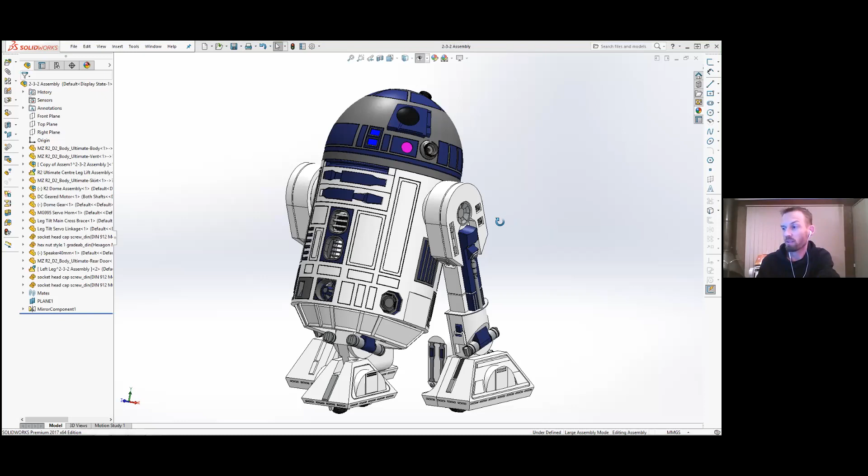Yeah, all right. So I'll bring up the model that I've got currently. See how this all works and see if it's all good. You should be able to see that now. So this looks like a standard R2. So thank you to you, Michael, for sharing your files, because that's sort of the basis for the body and the dome. I think the legs I pretty much had to remodel entirely, and the center leg, just for different features that I needed on it.

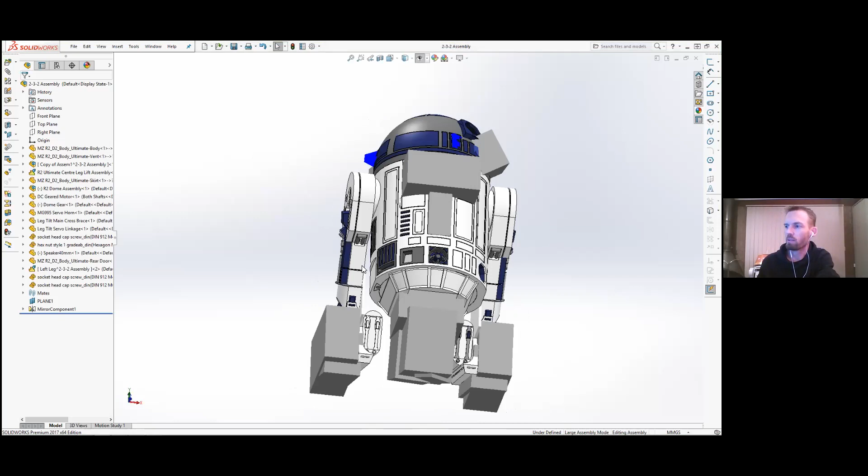So I guess I learned a bit from the version 1, where this is broken into many pieces. And then adding the mechanisms within the legs, which we can sort of go into. But the dome's pretty much independent. I can hide that at this point because we don't really have to look at that yet. I'm still working on the mini dome with a periscope.

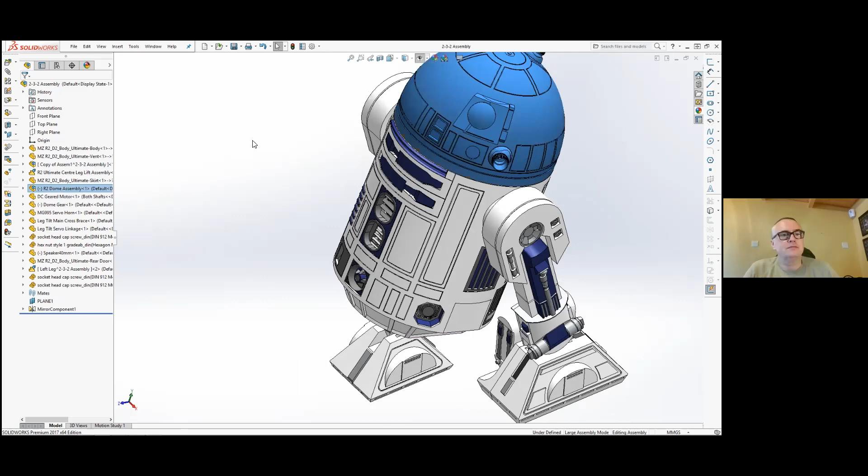So it's working. And then working with, like I said, the other builder, Gary, he's been working on verifying code for me, which has been good. Just having a second person to bounce it off is always a good thing. He can sort of test it before the whole gaggle of people get it.

So the main operating linkages that are within it, there's a slider crank mechanism in the front for the center leg, and then just a levered crank in the back, which connects across the back here to connect both legs together. And then for R2 to stand up when he goes into 2-leg mode, there's a tie rod that runs from the top of the leg here fixed to the body and runs all the way down, but we can sort of explode that in one of the other views.

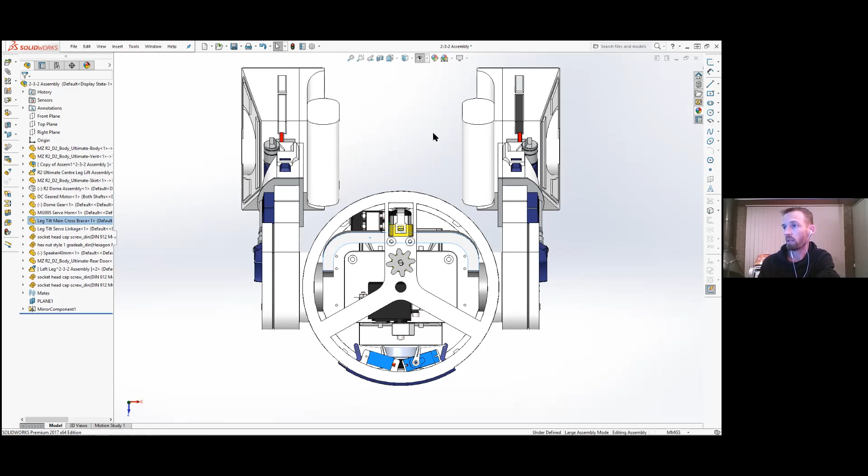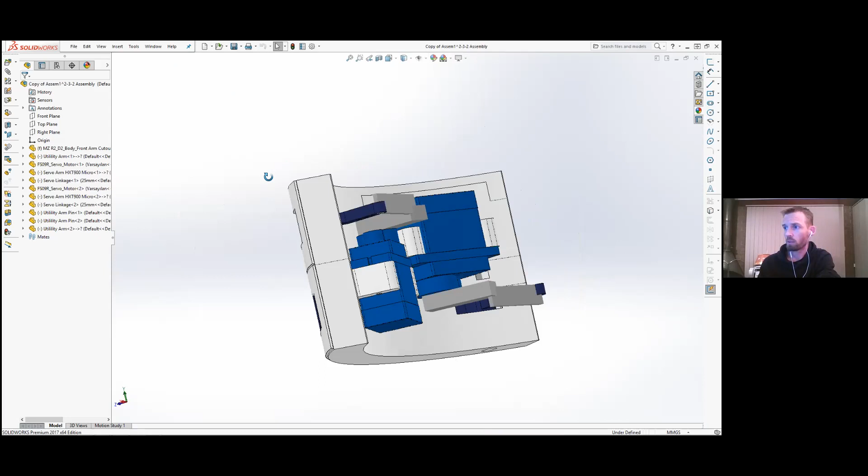So I think probably the easiest way, I won't probably go into the front arm too much. I'll open that a little bit. So this has already been released anyway. So some of these are the same setups that's already existing that people have access to. So the front arm mechanism is two SG90 servos. So people can go ahead and print that, can they? Yeah, so this is the same as what I did for the version 1. And then the principle of that is it's just an inverted sort of mechanism, similar to what you've done on the larger full scale.

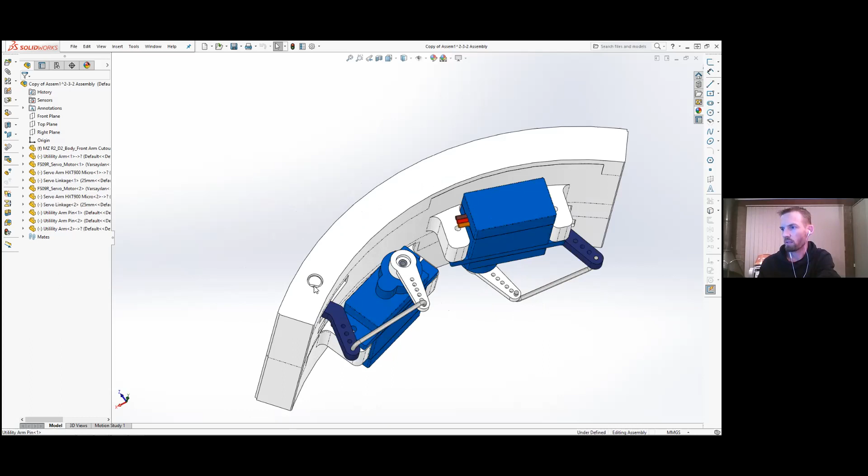So the only part needed is a bit of steel wire or a paper clip or something like that. And the rest of it's printed. The pins are all printed. So these have got a small flat on the bottom that you print it sitting flat on, but it should all come in fine on the print bed. And then it's just checking, because these are getting quite small, one of the limitations is how fine can a FDM printer print it.

So I've had to make a few sacrifices here and there, so it's all solid within there. But that was trial and error, just getting some of that to work. And these will pivot in and out. But so long as you print it, check it's all loose before you put it all together, and that the mechanisms easily work, then it shouldn't be a problem at all.

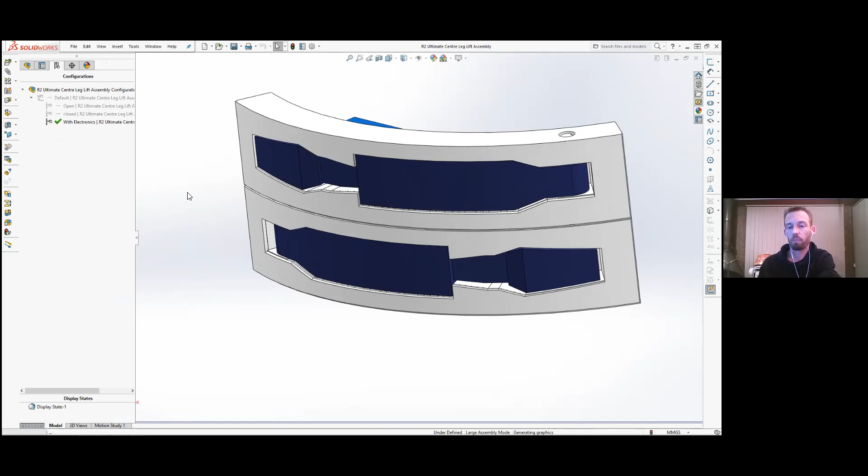So if we go back to the main center lift, the body itself is pretty much a hollow tube now to fit all this in. That was a bit of feedback, but also me printing one of them and not fitting my hand in the body. There's too much stuff in there. So I couldn't physically get my big mitt in there.

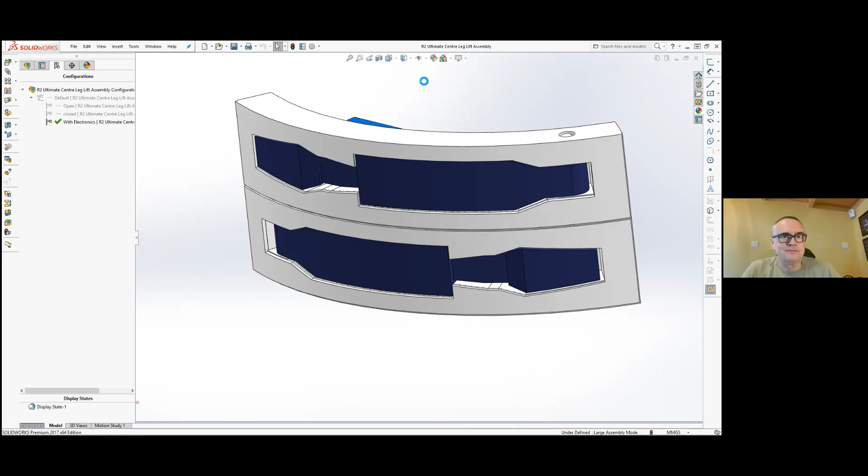You'd have to use small children to assemble it then, do you? I'm waiting for my computer to catch up.

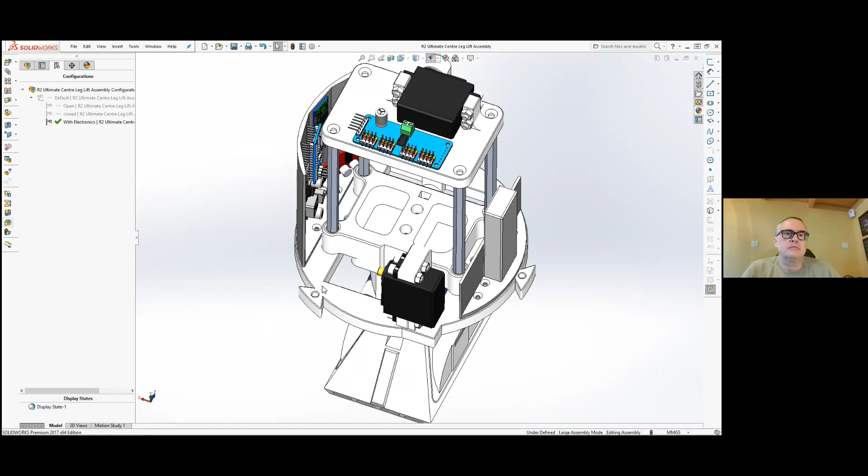I'll jump on this other drawing that we've got here. Oh, here's the center mechanism. So that's the center mechanism. So you pretty much assemble this whole unit outside of the body. There's 3 dovetail locations that locate into the body at the bottom. And this is the rear linkage that drives the leg main tilt mechanism that'll drive a servo arm up and down here.

And then the front linkage is your bell crank, 4 rails. Learning from the periscope mechanism, I had dowels on that. And then I thought, hang on, I can just print hexes. I can lay them flat on the bed, print, and then there's a perfect size, and everybody can repeat the process without buying dowels and acrylic rods and all those kind of things. So we learn as we do this and get better.

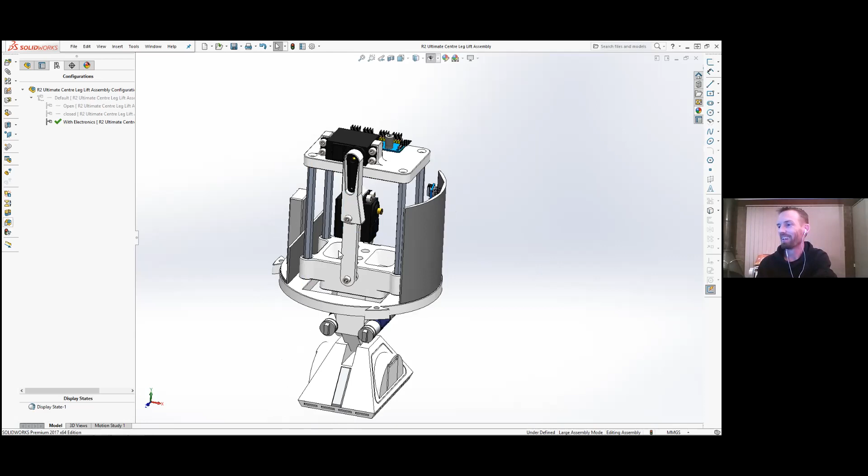So there's small things like inserted nuts, M4 nuts that go into here, captive nuts. I guess you could put a nylock in there and just lightly do that up. I haven't added bearings. I've just tried to keep it really simple. And the other thing I'm trying to do is, it's weighing about 2.5 kilos now. So the weight's actually added up quite a bit. So I'm trying to reduce the weight because it's quite chunky now.

How did the hexes slide? How would you find the hexes slide on plastic? Are they fairly smooth? Oh, perfect. You saw it working just before. It works really well. It was a bit of trial and error, but it's worked pretty well.

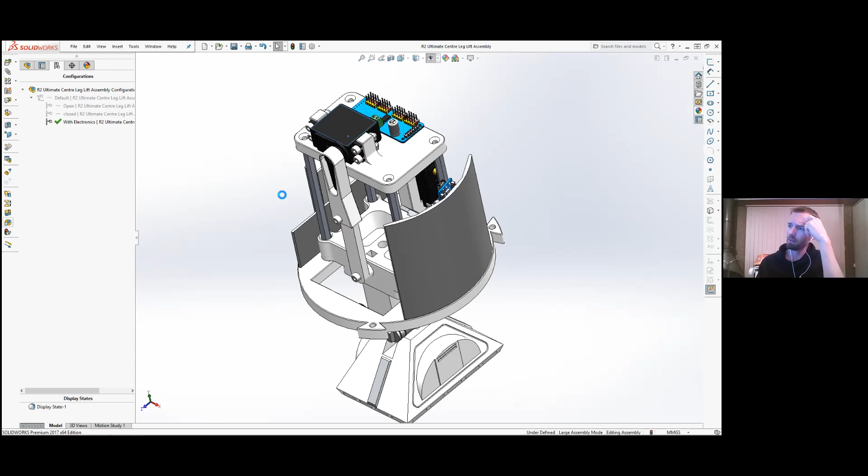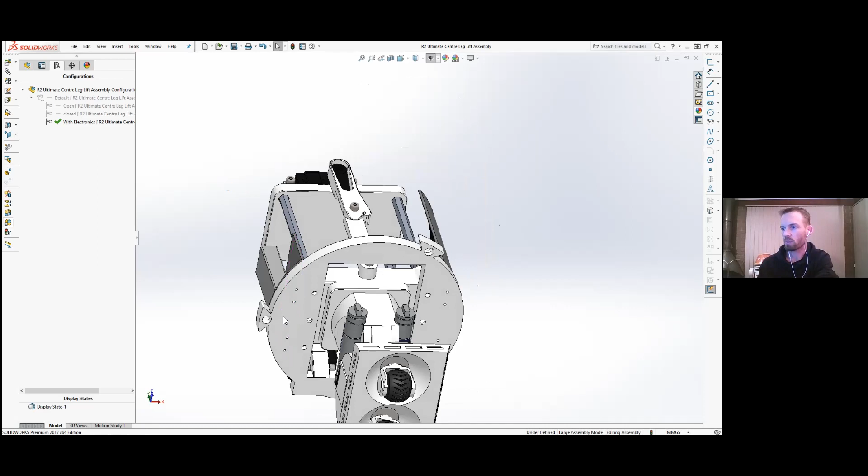And it just gave an option where you can either screw them in with a couple of wood screws or a few other options like that. But like I said, just trying to keep it simple, and then it's accessible for everybody to get all the components or print them without having too many supplier issues worldwide, sort of thing. So this has got 3 socket head cap screws or M4 bolts, whatever the case, to put it in.

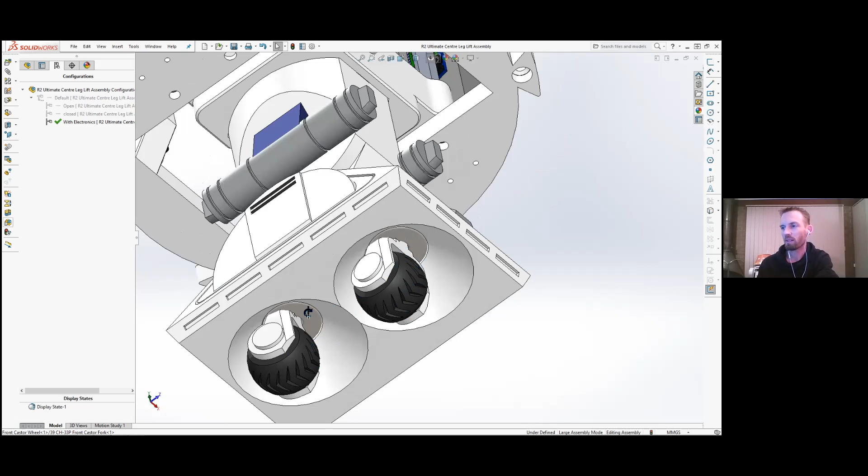Little things like the original caster wheels I did, it was sort of based on your design for Tito, I think it was. Tito, yeah. But then what I did was I realized that having the bearings in the wheel either side, which I originally did for Chopper and mini Chopper, it added too much weight because now I've got 2 idler wheels instead of 1 in the 3-leg mode. So I removed the bearings and just made this little plastic, just PLA printed 2 bearings in here, and then it works fine.

There's another bolt that just goes in here to hold the leg on. Again, just make sure it's loose when you do it up so it can pivot easily. Little things where this is the front of the droid, and I realized when I drove it, if I went in reverse, the front foot wanted to kick up in 3-leg mode. So I don't know how they do it on the big droids. I haven't made a full 2-3-2 on a large droid before.

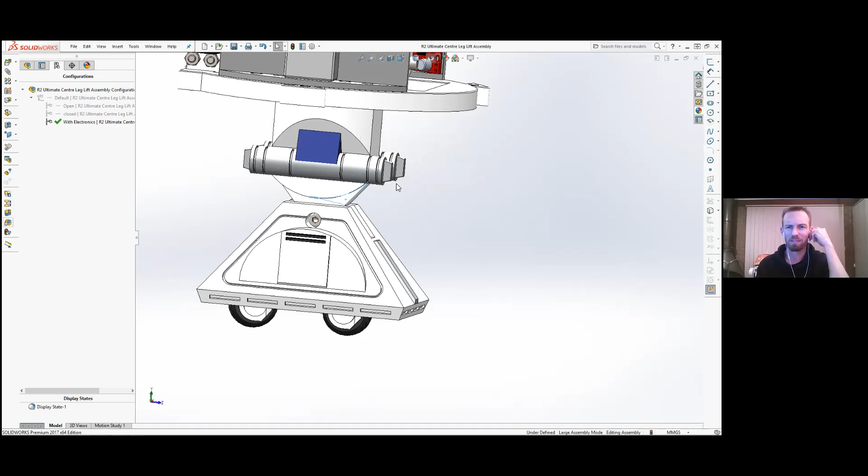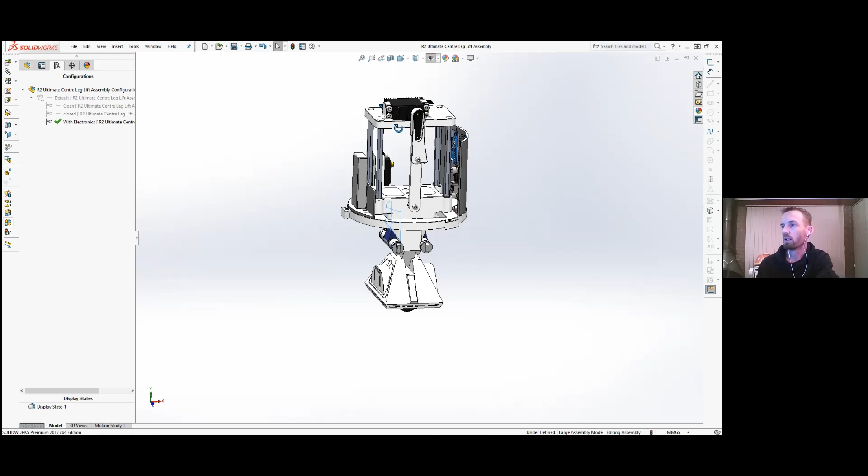So these things, the cylinders, ankle cylinders, are just printed separately, and then just a couple of dowel locations with PLA. And then this is an ankle. This is a separate piece that just inserts into this lift mechanism part. So you can pretty much assemble the lift without the foot in it, get it all working, see how the mechanism works, and then it's pretty tight in the body because that's all got to squeeze in there.

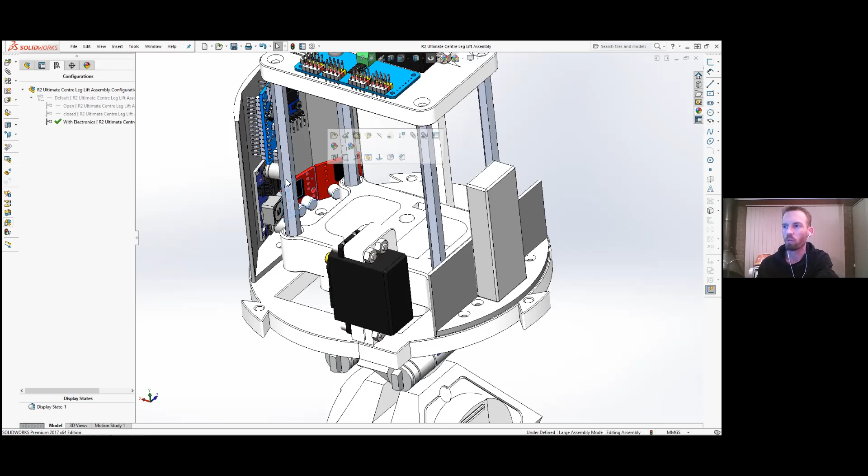At the moment, I'm using just the MX1508 motor drivers. You can replace these with whatever you want. It's really cheap. Being in Australia, sometimes it's hard for us to get stuff. We don't have the local supplies that you'd have probably in Europe or the US. I've just got a little DC-DC voltage converter, Arduino Nano, and an HC-05 Bluetooth module.

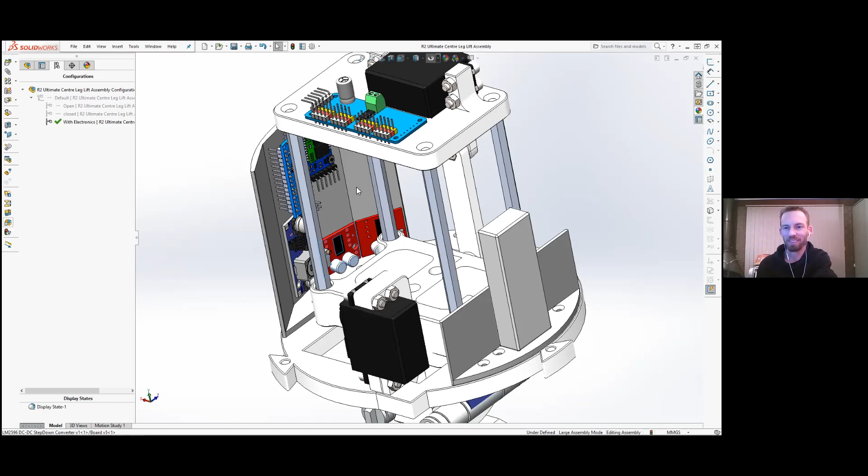That's one of the problems with the full-size one, just fitting the electronics and batteries in, and it's probably even worse on something this size. Unless it's Chopper, where it's just got this massive cavity. Yeah, exactly. All droids should be short, fat, and big. We'll just design another one that's short and fat and big. Exactly, just another totally different one. That's the great thing. You design your own. You can build it around the electronics and components, so it's easy to assemble.

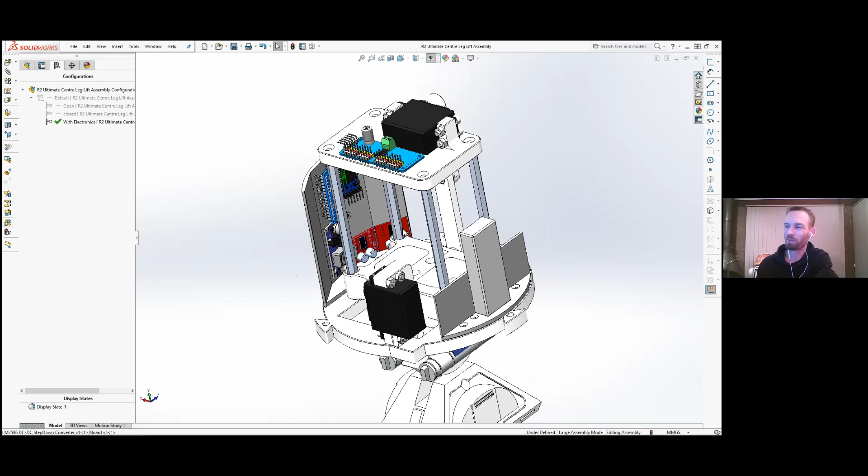That's it. Once I started, I had things driving off of the Arduino itself, and it started to get more and more complicated, and there were too many wire connections. So then I introduced the PCA9685 servo motor driver board. So this board here controls the 2 lift mechanism servos, the large ones. It controls the 2 front arms.

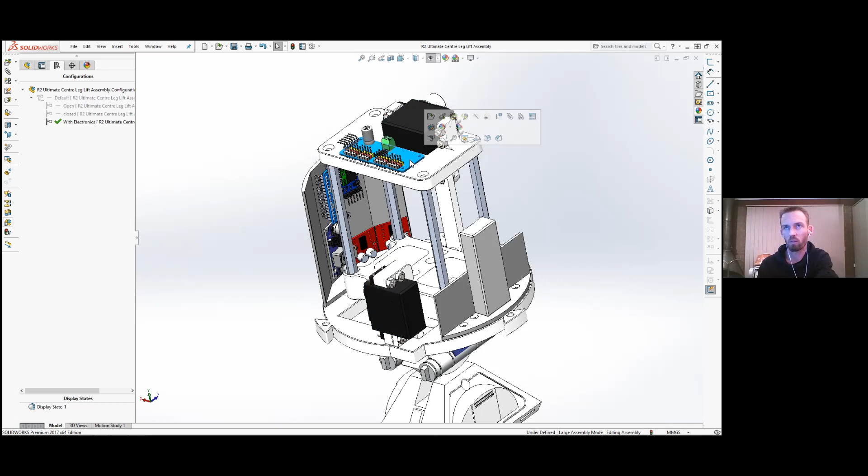And then from that, you piggyback off of this into the slip ring, which goes into the dome. And then in the dome, you have another one of these, and that's it. All the power supply, all the communication comes straight through with the 6-wire or 8-wire slip ring. There's some 6mm ones that, again, just working with Gary, we're trying to find a good source for at the moment.

You can run a separate Arduino, a PCA9685, and just a 5-volt battery supply. You can use, what are they? The little power banks that you get. I've got one somewhere else. Just these little USB power banks you can buy from Officeworks, or just use those. So this is like a 2200 milliamp hour one. I had another small one somewhere, disappeared.

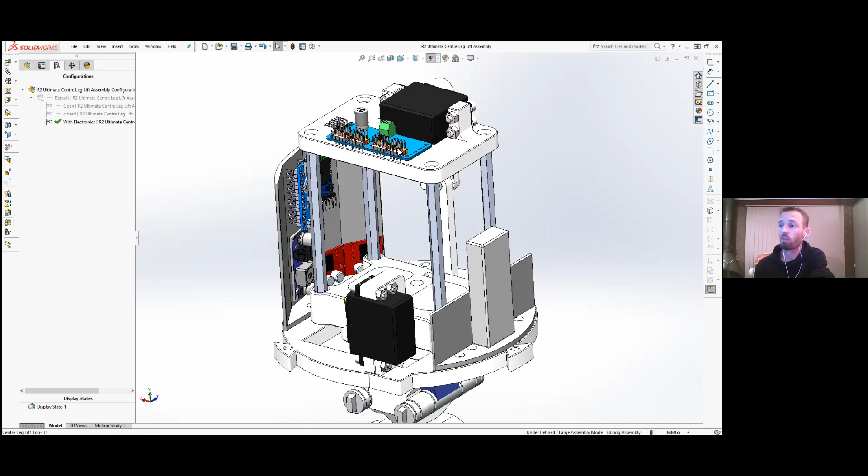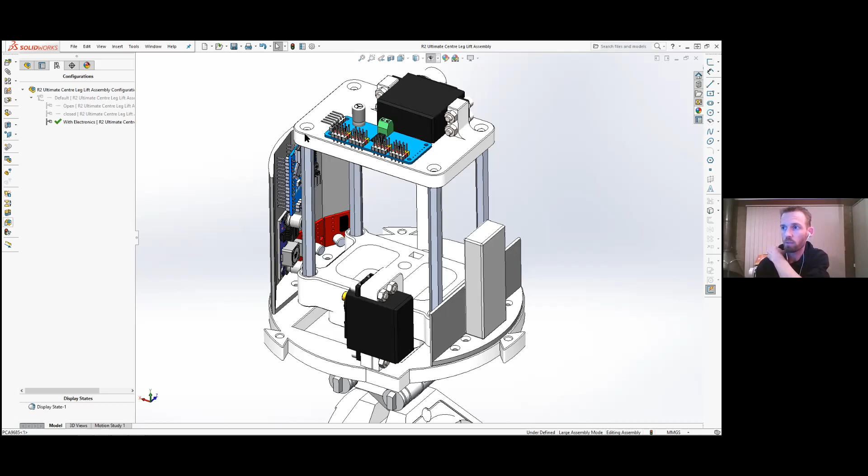So you can just run that in the dome, and on the PCA9685s, you have this one as the standard one, and then you just have to give a signal A0. You just solder the pad to give it as the second location. I've got that in the instructions as well. And then you daisy chain, but you need to send up the power through that as well. So this receives 4 lines from the Arduino, and all I did was at the top of this just put a connection and 2 JST connectors or something, so that you can slide this in.

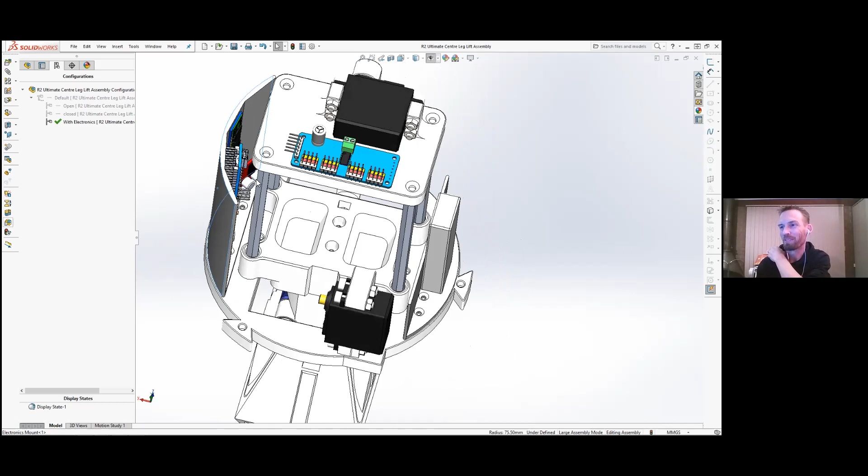These are printed mounts just to fit all the electronics on. You literally can't have anything come out the back of this, otherwise it won't fit. That's how tight it is. And then where the mechanism slides, about 2.5 mil, I think. Just enough to hot glue everything on there. So it's not too messy. And it's just a matter of cable management.

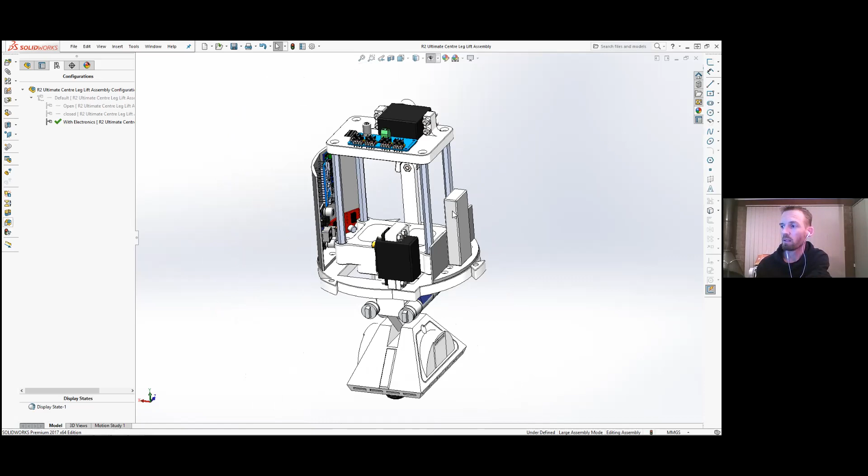This is an 850 milliamp hour battery. I guess you could piggyback a couple, but people could come up with maybe clever solutions for where to put it. You could sit it on top of the servo if you wanted to put a bigger battery in, possibly. But that's the main mechanism for the internal. That's the tricky bit for the inside, just trying to squeeze all the electronics in there. And where does the dome level come with the top of that servo? Is there much clearance?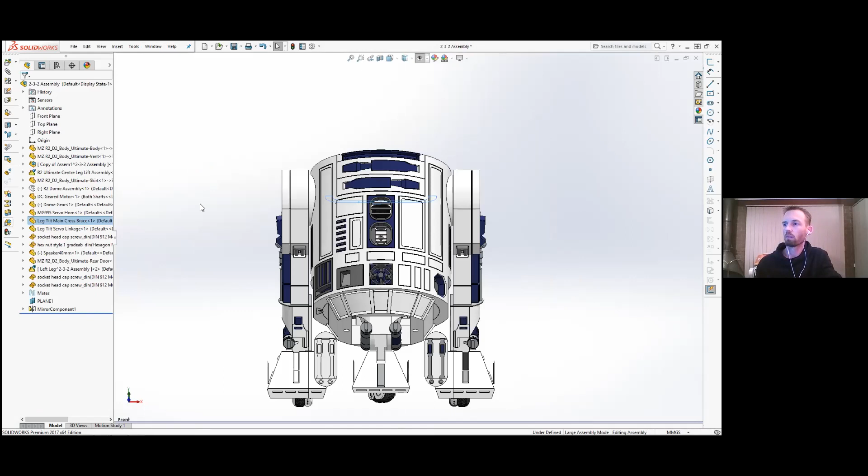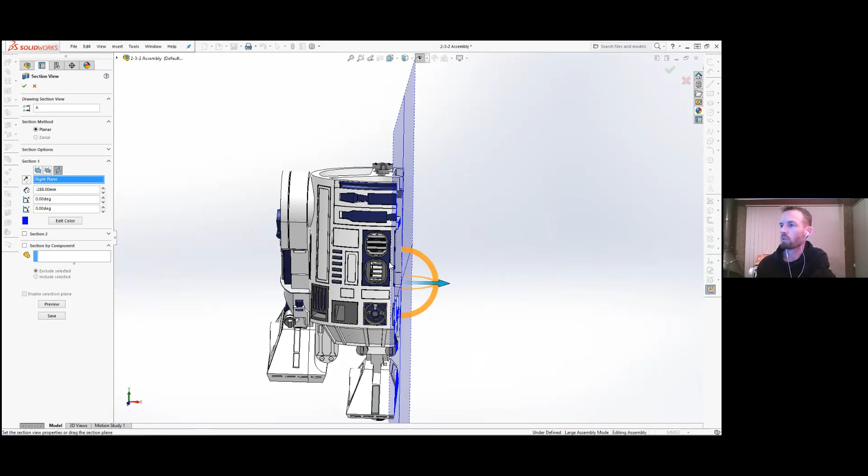Not really. I'll just do a section view in here. Let's see if we can get that, if my computer can cope. It's not too bad, but it's not great either. But as you can imagine, it's getting pretty squishy in there. Just section it there. There's not a lot of room, but then you've got the lift, the other mechanism on top of that as well. So that's where you've got the crank in the back as well.

So once you slide this into the body, and it was little things like that. Originally on version 1, the skirt is a separate print as well. Now it's got 2 socket cap screws that retain in the bottom of the base plate here at the body. I originally had it screwed in from the inside down. I couldn't fit my big hands in there, so redesign. Just a little bit more plastic. That green arm is the main linkage pivot for the leg mechanism. I'll bring that up in another image as well.

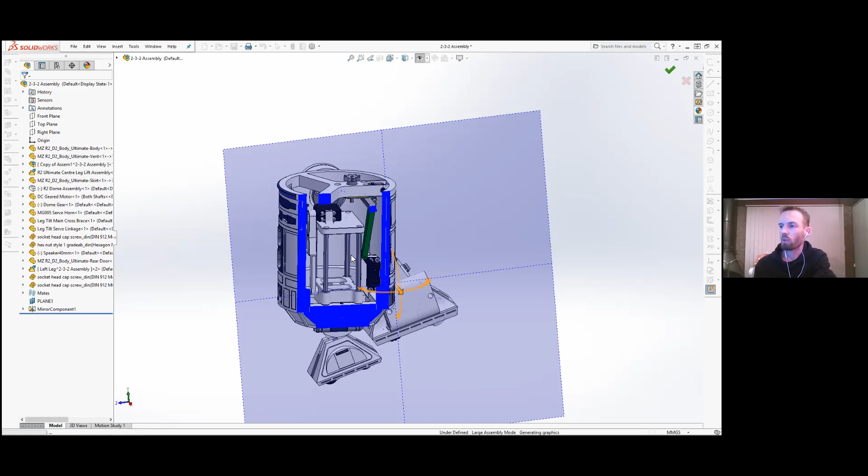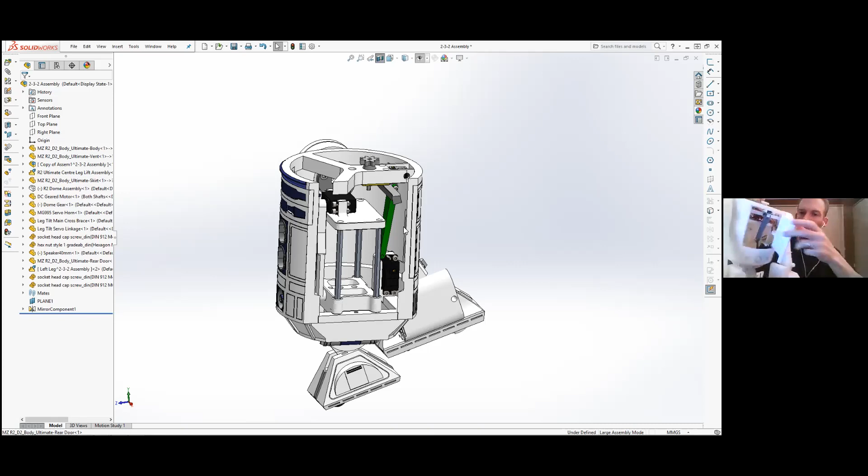Once that's all installed, the back door is separate as well. That just pops off. People can either hot glue it, or I've got a couple of small 5mm diameter magnets if they want. I've designed a little hinge in mine with a 6-bar linkage, I think. I don't know if you can see that on the screen here. It works, but it's not great, and it's just really fiddly. It's just a little hinge in there. If people want, I can put it up. Again, I probably need to get a resin printer. I'm getting too far on the limits of FDM printing.

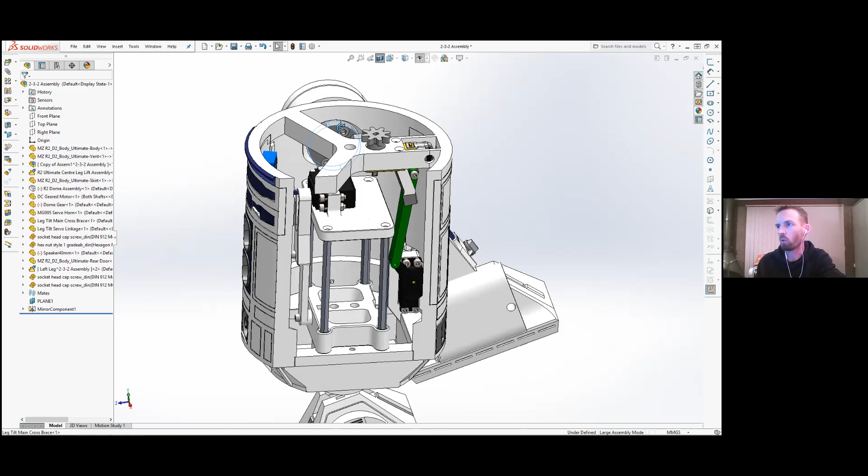So that's the summary of how that works. You put it all in with the back door off. You can get your fingers or hands in there. You can attach the little M3 bolt in here to capture this, the M4 bolt in here. But you'd assemble all this crossbar linkage internally with the legs before you put the lift mechanism in. Right, so you can have it upside down and get your hand in from the bottom. So effectively it's a 2-part build, and you can separate it fairly easily once you've assembled it. Yeah, exactly. That's where the dovetail is located in the bottom of the main body.

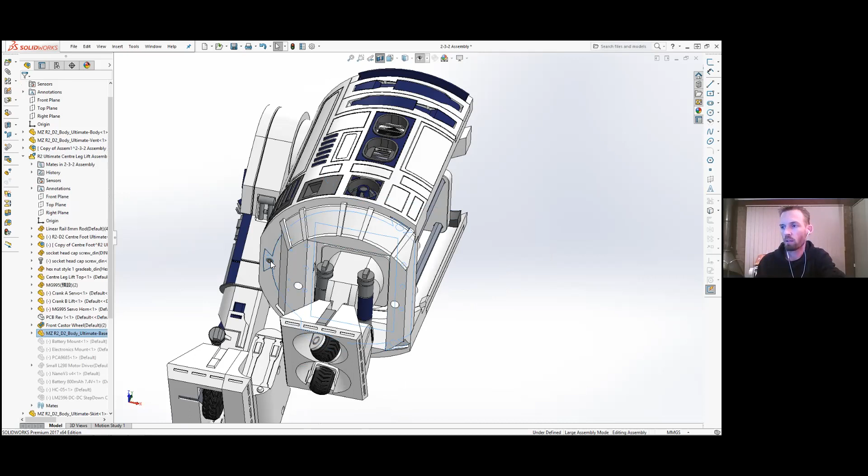Prints upside down with no supports. And then you just push in the base or that center assembly. That all just shoves in there. Three screws, and then two screws in here for the skirt to retain it in. And you can't actually see too much in there anyway, but I've got to compromise and sort of remind myself, well, this is pretty much a toy size. So when you look at a toy, there's screws sticking out everywhere. Exactly. So that's sort of the main internals.

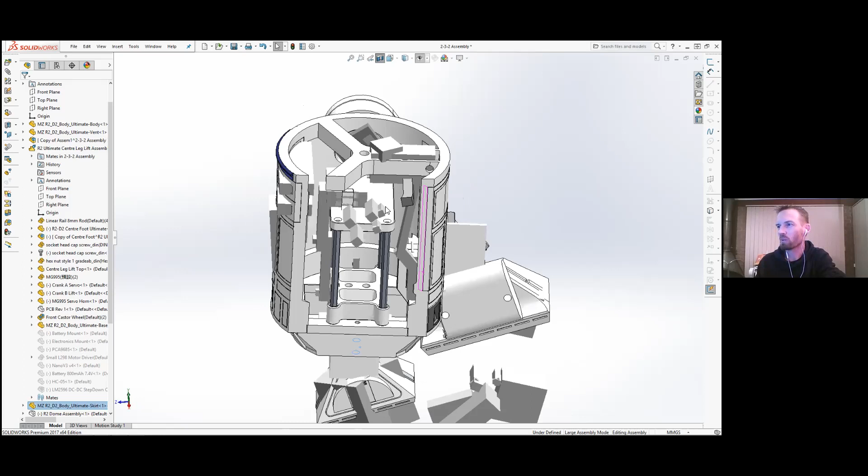And then, like I said, in hindsight, I would have made this hole on the original designs for the version 1s of these a little bit bigger, that suited sort of a 20mm slip ring or something like that. At the moment, I've got a 6mm hole that I can fit through. This is a 10mm diameter hole that is where the pivot is on the gear.

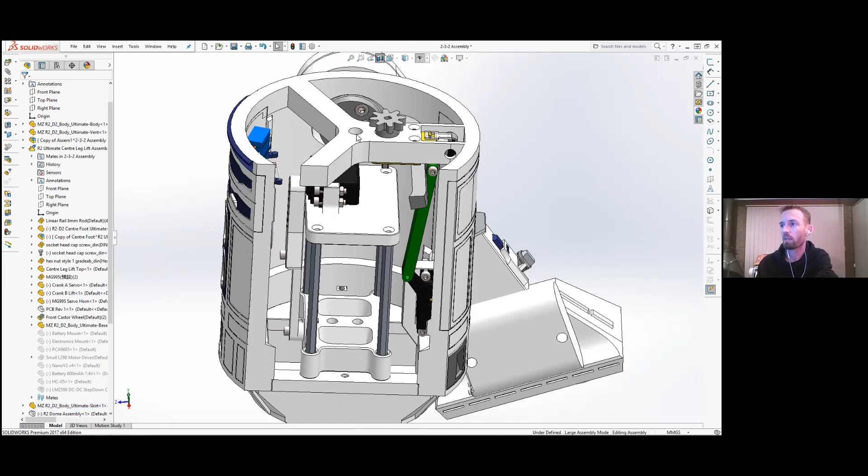Just one note, there are different geared motors of these yellow motors. There's a 1:120 ratio and a 1:48 ratio. Okay, I didn't realize that. I think Gary again pointed that out to me. So maybe just check. I had the 1:48, so I'd probably recommend those. You could have them all the same, it doesn't matter. But if it seems a bit sluggish, maybe you've got the 1:120 ratio. Did you get torque issues on the faster ones, or is it okay?

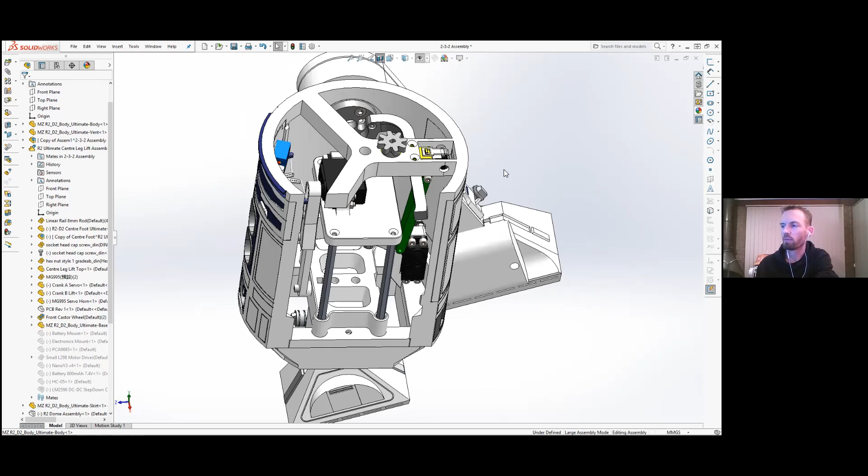No, it's all fine. But again, those motor drivers... my background's mechanical engineering and fitter and turner, so I'm not an electronics guru. I'm all self-taught. Other guys in the group, I think Ben, how do you pronounce his last name? Rees? Ben Reed, yeah. Right. And Trevor, there's a few guys in the group that are fantastic at electronics. They offer little kits, so you can get in touch with them and purchase kits from them, which is great. You've got your stuff on your website as well, little BLE boards. So there's options there that you can make this work whatever way you want.

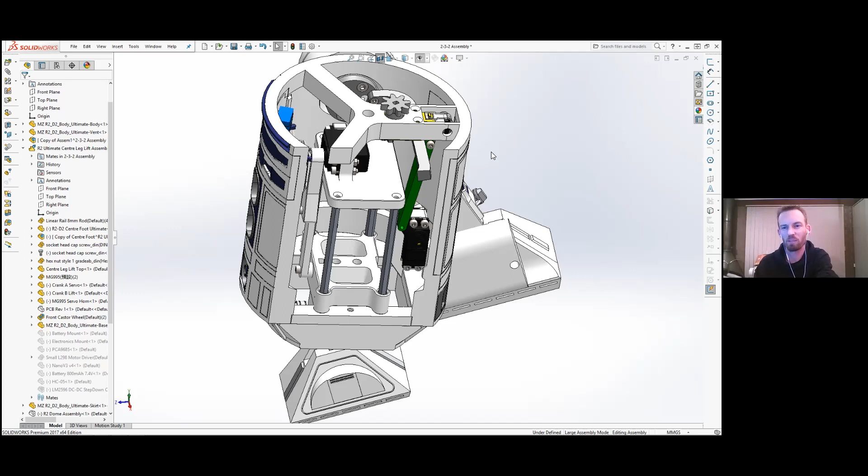Me going down the path of a Bluetooth app, that was probably to allow people to do this without purchasing RC transmitters. Yeah, absolutely. And also for gifts, if you want to make it for people as a gift, then they're not going to buy the RC. Yeah, just anybody, exactly. Then they can download the app, choose the droid they want, and off they go.

Is that on iOS? You got iOS and Android, or just Android? So it's Android at the moment. I wrote the app on MIT App Inventor, which is free software, and this works great on Android. They've released an iOS version. I tried it; it didn't work yet. Okay, so there's hope. I don't want to have to redo all the code. It's quite a bit of code, but even that, it was me learning how to do code debugging on phone apps, and why is this Bluetooth not connecting? And then my phone was hung up because when the Bluetooth doesn't connect or disconnects, what do I do? The phone didn't know what to do with itself. So just little things like that.

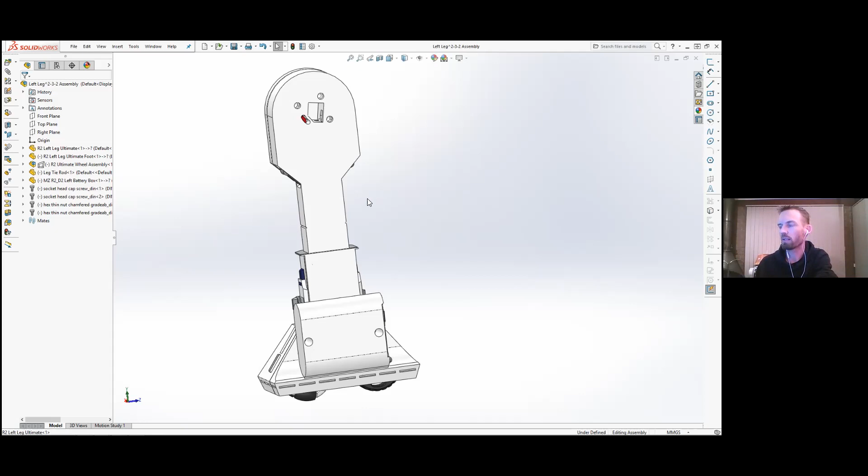But so this one here's the leg. The leg's printed flat on the bed. You can't print the leg with supports. Why? Because there's an internal cavity which allows you to run a little rod in there, which is when our R2 stands up in two-leg mode, he won't face plant. Yeah. That's the secret of the 2-3-2 bridge, which I know you worked on a bit yourself.

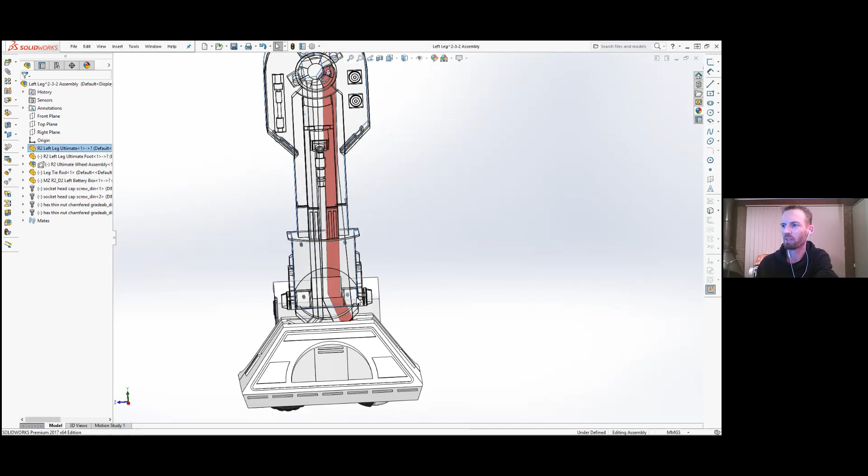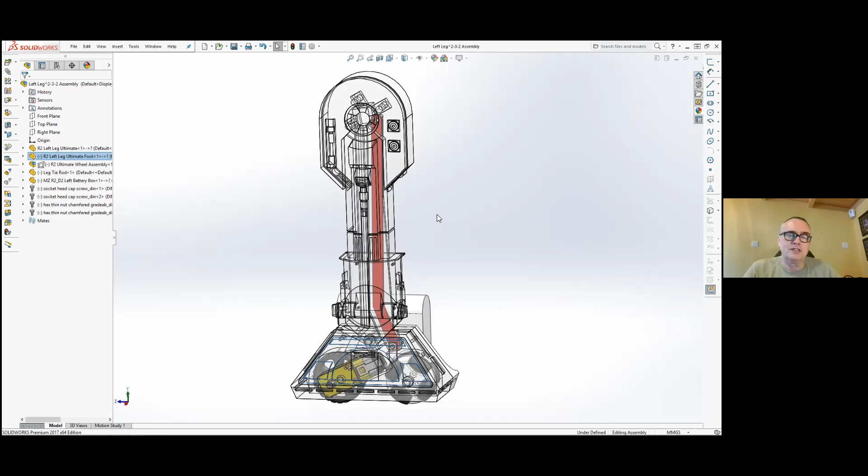I did. The physics on the full size one, that bar takes a ridiculous amount of strain. And I tried printed ones, and I tried all sorts of different ways of getting it to be strong enough in a printed mode, and I just couldn't get it. Potentially a metal one might work, but it's the advantage of smaller ones. You've not quite got as much stress on the physics side of things. Yeah, this was a bit of, I guess, trial and error.

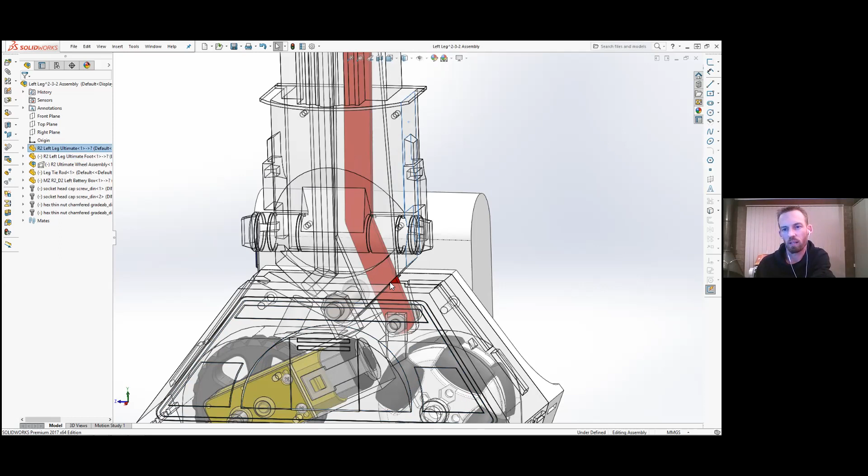Got it on the first try, which is great. It stood up and it didn't face plant. So the only thing with this is there's a retaining bolt down the bottom, which is just an M4, again, a socketed cap screw, an M6 bolt, which is the main leg pivot. So there's the leg sort of here. It's the bottom of the leg that inserts. And then I've got these wedge-shaped pieces where it's got a mechanical physical stop as well. So that takes a bit of the stress out of that as well, where it presses against the leg.

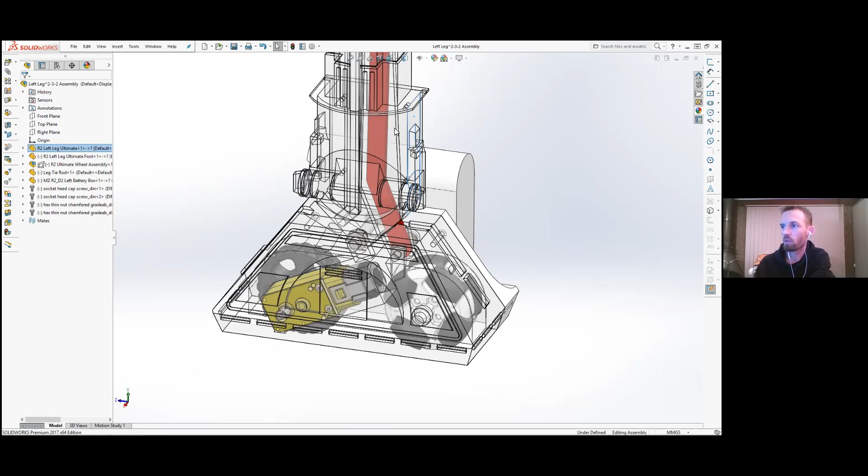Again, just the DC motor, just a 3D printed Omni wheel. People can buy them if they want to, but I just 3D print it to make it easier. And then the battery box, again, it's just a cavity filler really for this aspect. Everything sort of sticks in the foot. Bolt down the bottom. Don't print the leg with supports because it'll print flat, and then that cavity will get filled in and it won't fit in there. The bar goes up through it.

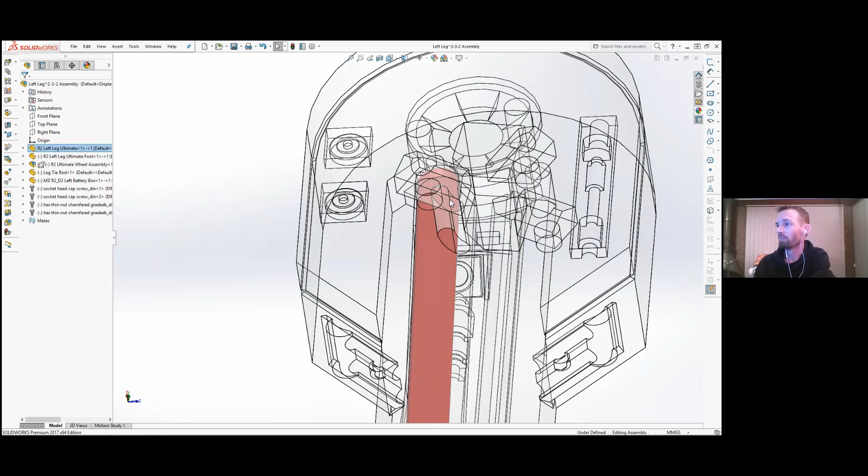It's not there, is it? It's impossible. Is it standard Omni wheel size? Yeah, 50 mil. Yeah, I went with the standard size, so if people do want to buy one, they can. I think I just downloaded an image somewhere that someone had dimensions on their page and reverse engineered it. You can buy one though, that's fine. Support the business. There's just some M3 retained nuts in here.

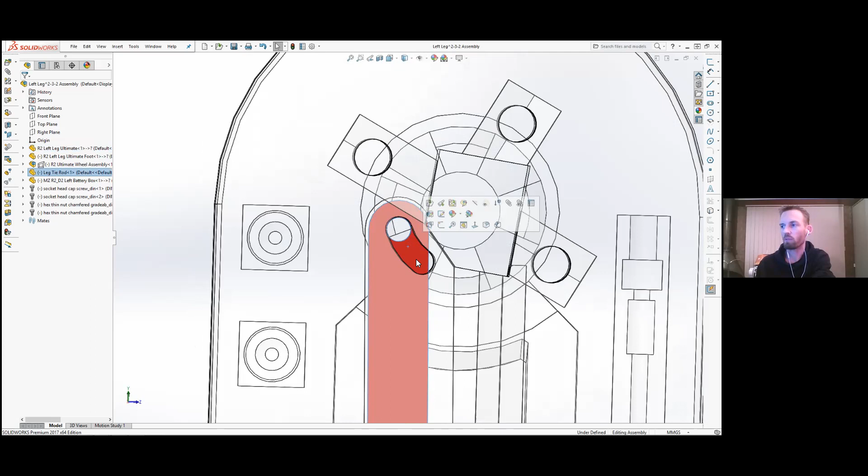And the only thing that's sort of tricky, this tie rod is the bit that actually, there's an M4 by 35 millimeter screw that goes from the body through the leg cat, through this hinge point here, because the top of this tie rod is fixed to the body. So it knows when it pivots that I want the ankle to be at 18 degrees or 0 degrees. So that's what it's controlling. So that's that secret bit of how does a 2-3-2 work? That's the linkage bit. But like you said, on a full size, it's incredible force in that, and it's got to be solid aluminium or steel.

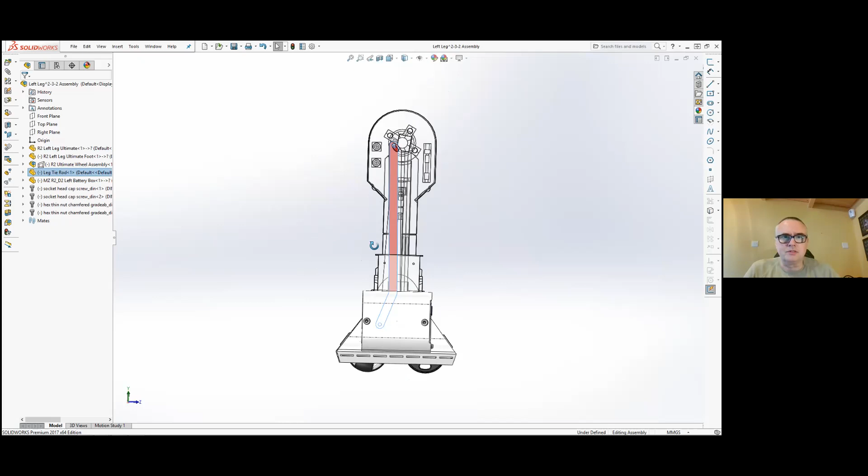I've seen some very clever gear mechanisms in the leg itself that actually give it more strength, but I've never kind of got around to having a proper look. Yeah, some guys, they'll have the gear mechanism at the top, and then they'll actually have a separate motor down here as well. But going this size, that's all I could really get away with. But I'm pretty happy it works. It has a little bit of a lean to the body slightly, just from, I guess, clearances on nuts and bolts and things when it stands up in 2-leg mode. But other than that, it's worked pretty well.

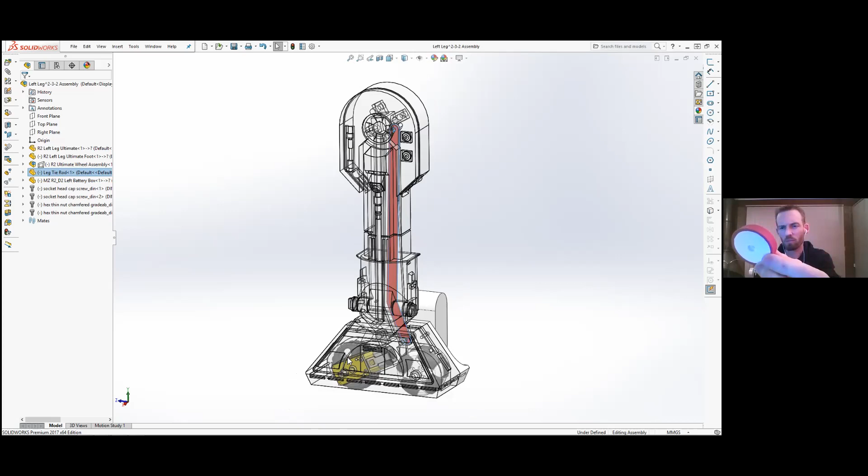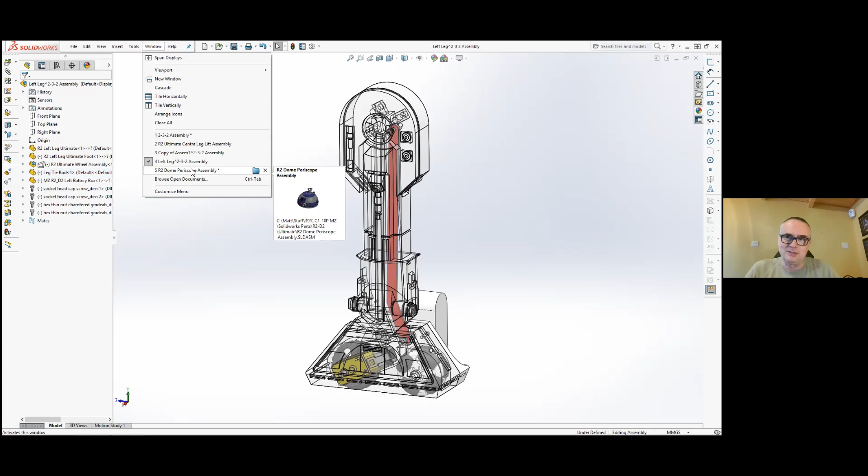So I've just done a rubber wheel lately. Yeah, I saw that. Give it a bit of extra traction. Yeah, just got the design from some crazy guy that did one of these. I don't know how he did it. But what you've got to do with those is you have to make the tolerances incredibly tight, so it's really hard to put the rubber wheel on. You have to put it in boiling water, which I believe that guy did. I'll adjust it because that went on too easy. I did learn that not all TPUs are the same with that, because mine went on quite easily.

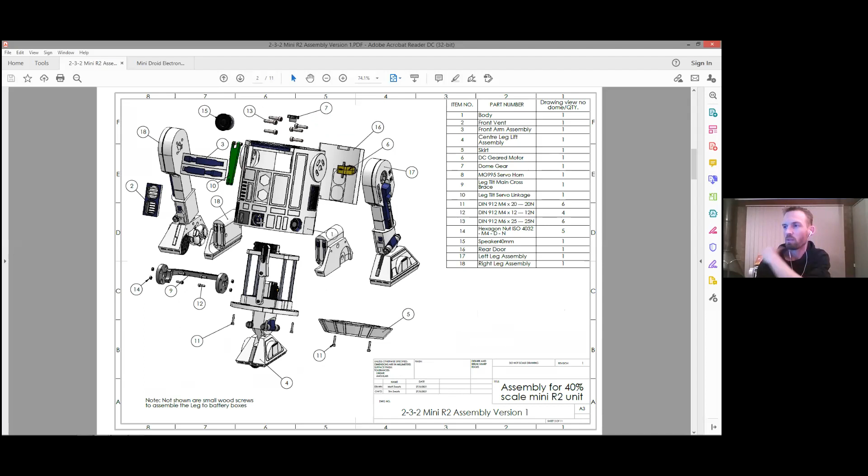The other bit that will come out with this will be the assembly drawings that I do. So this is just sort of giving an overview of how it does look. There's just a bit of an exploded view, sort of detailing, here's a little sub-assembly, here's a sub-assembly, the leg's independent with the rod in it. So hopefully it's enough. It is a little complex build. There'll be lots of questions. Hopefully the community can help with that. I think there's some really great guys that help out and try to answer as many questions as they can as well. There is, yeah.

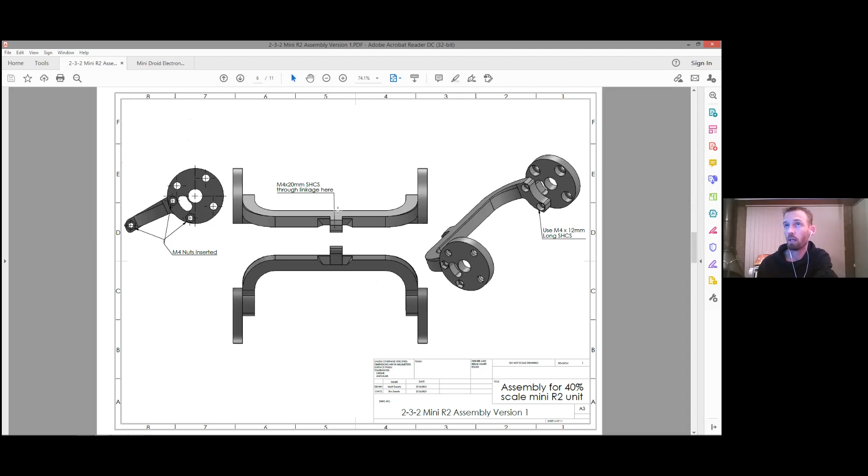So that's sort of explaining just how the tie rod mechanism works, where the bolts go. Just give a sectional view again of how it should look when you install it. And then again, this is that little sub-assembly. There's some little bolts that go in here 12 mil long. If they're too long, they'll stick out too far and they'll hit into the body. So just watch the length of the bolts that are suggested to use. That's just where the linkage mechanism attaches on that bar on the back onto the other servo that changes the leg position, which is this one here. So that silver part, the main crossbar, that'll be installed in the body.

It's a bit of a shove to get it in there because you've got to just deflect it a little bit to fit. And then the 3 bolts go in. That retaining bolt goes through there again, the M4 by 35, and that locks against the body and into that.

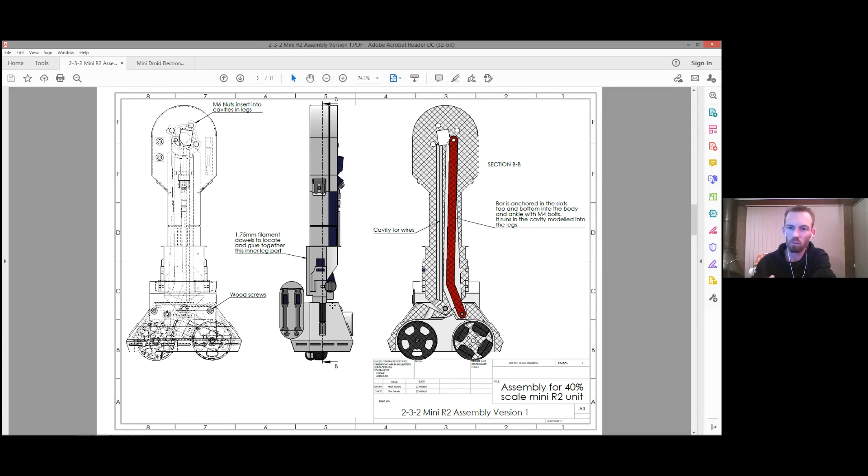It's kind of just with that tie rod. I actually just made that about 3.5 millimeter diameter, and then just forced in an M4 bolt before I fitted it into the part. Little things like that, just to try to make it easier to then assemble. But just making sure before you assemble it that everything fits, it's loose where it needs to be loose, tight where it needs to be tight, just those kinds of things.

So that's just, just go back one. Loaded. Yep. Yeah, that's obviously the prototype for the 2-3-2 bucket that you're going to do in the future, is it? Bucket? Oh, yeah. There's even less room in him. Like, hey, no, I've got a full-size bucket. That's the full-size bucket. Every time we do something, you then get the comments of, wouldn't it be great if you could?

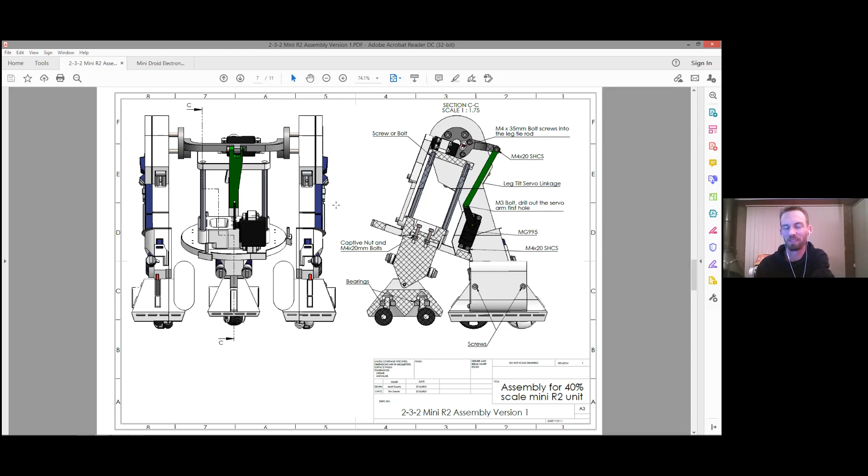So my son is my creative genius, by the way. He's the one that, I started with an R2 center frame and then your printed dome. And then we went to an event. There were already 3 R2-D2s there in Australia. There's not many builders, but it's a pretty good community still. And then he said, can we make Chopper, Dad? And I said, yeah, okay. So we did a Chopper based on all the scrambling of files that used to be there before you got yours out. Yeah.

And then last year he said, can we do Bucket? Sure. So then we did a full-size bucket. And yeah, it's pretty cool. We haven't taken him to an event yet because of COVID. I know. Can't wait. There's going to be a massive explosion of different droids at the next event. It will be, absolutely. So looking forward to that.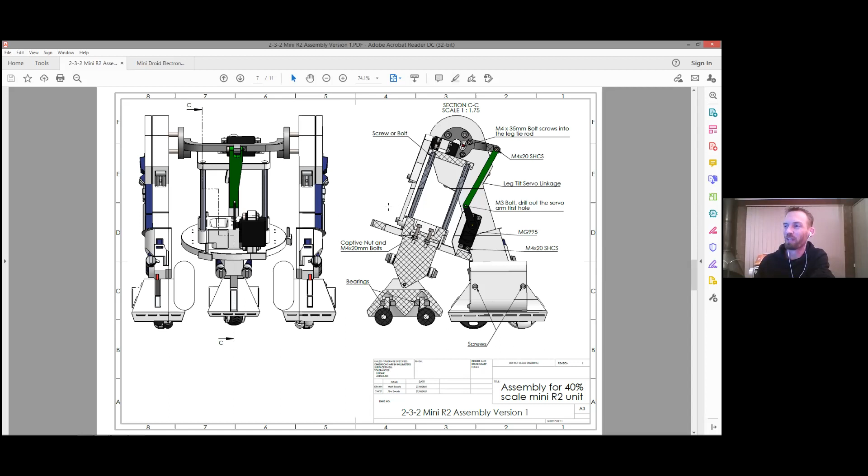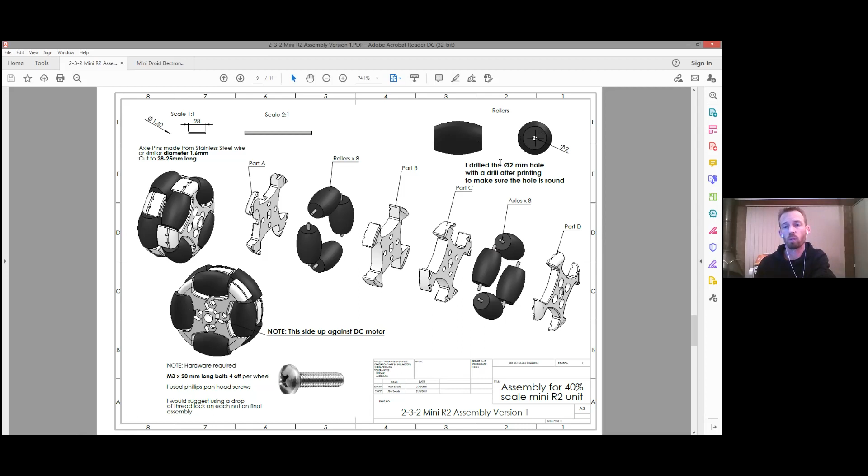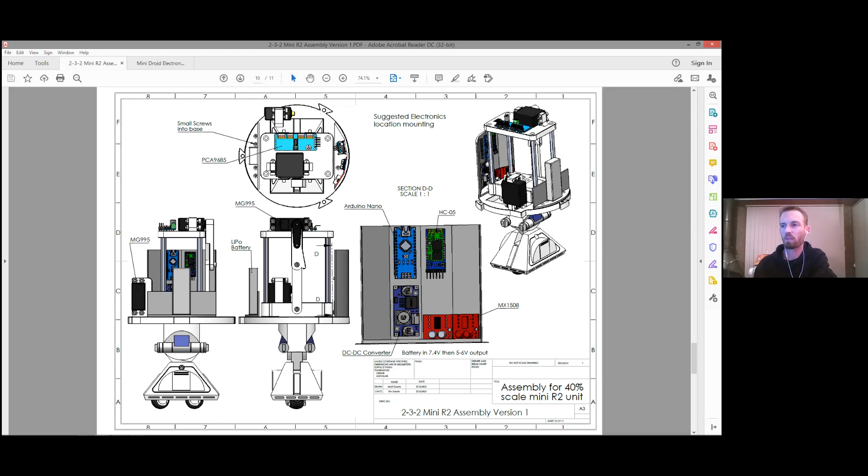So it's not impossible. And then with the electronics, again, I'm not an electronics guy. I'm trying to just give the best I can. So apologies. I think one of the last drawings I had the TX and the RX pins around. I'm like, oh no. And people were getting sort of mixed up. But hopefully it sort of governs what the basics are. I'd suggest to people that don't work with Arduinos, just start with the blink sketches. Start with looking up how to connect a PCA9685 to an Arduino. Get the servo motor to work off of that kind of thing. Do the basics first before you jump into this.

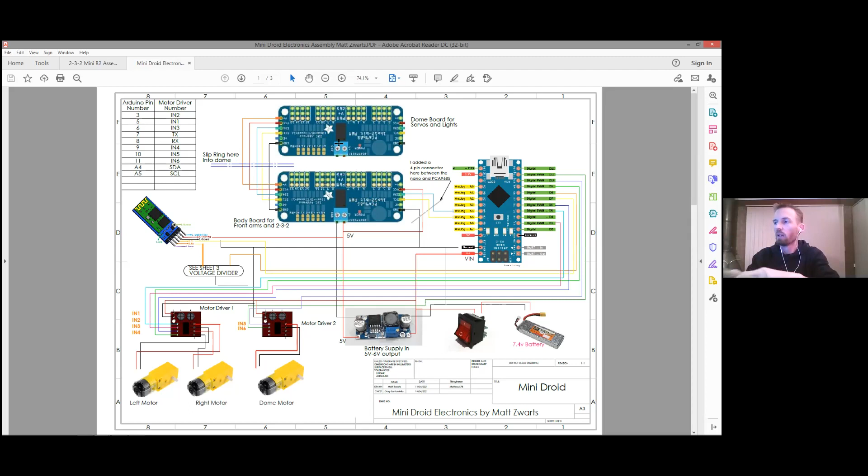But these are pretty handy little boards. You can expand that as much as you want. So this board here would cover the body for servos, and then straight up into the dome, like I said, the slip ring here, and then this drives everything, and everything connects with the little servo wire cables, the jumper cables or whatever. Yeah. It just makes it easy as well for all the connections. You can just plug all these in. So you can drive LEDs off the PCA9685s as well.

So with those, you just have the drive pin, which is the PWM, and the ground, and that connects to the LEDs, sorry. And then like it says on here, with servos, you just plug in the ground and PWM and that controls all your servos. So that's the holos and the periscope. You can run this independently.

I can't remember, I think it's 40. It calls up in the PWM library, and then it calls up 41, and that's where it gets this. I think it's binary. That's where you just solder across that pad. When this is connected with those 6 wires, that's what drives that one. So it seemed like a really simple way to do it.

I've got just a little table here to say, well, what pin number is it in the body? What does it connect to? The front arm, the center leg, the body tilt. What pin number is it on this one? Remembering that it starts at pin 0. That catches me out still when I plug it in and go, why isn't that working? It's 0, 1, 2, 3.

Yeah, okay. That runs all this, the dome lights, which are all just random blinking, the holo servos, the rotational ones that I did, the little mini ones, the periscope up and down. So I've already planned ahead for that to happen. I'll probably add another one in here for the periscope lights to work as well.

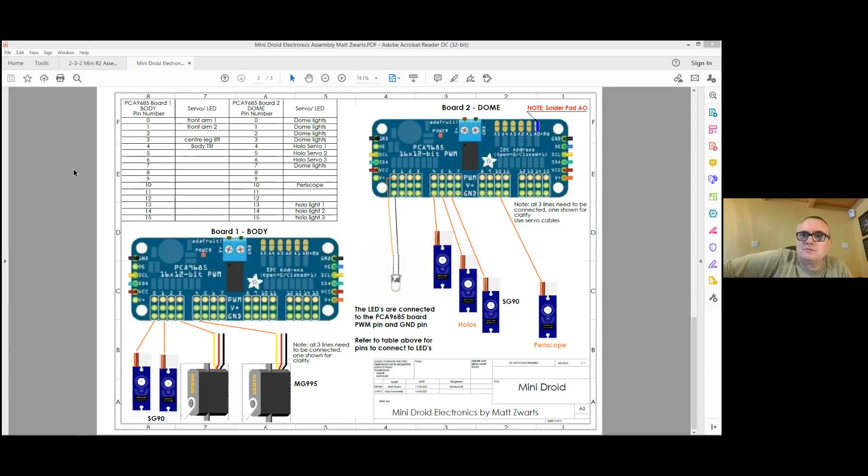I know you've got probably the HC-05, just connecting this voltage divider. To explain it to people, the Arduino is running on 5-volt digital pins. So when it's putting out a signal, it's 5 volts, but the HC-05 doesn't want to receive that. It wants to receive 3.3 volts. So you've got a resistor here of 2K and 1K here. So as long as you connect this, that's what it is.

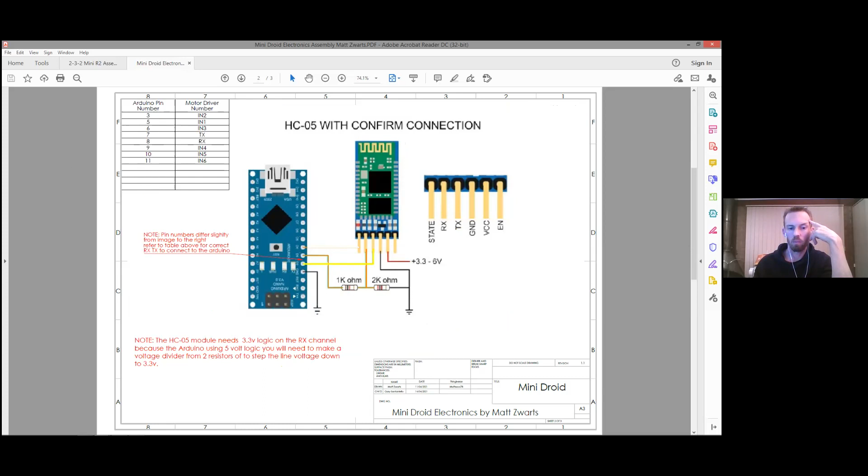I've put in the code a little cheat line, I'll bring that up actually. There's a little line in here. So if someone soldered these in or wired these the wrong way, you just comment these out and swap it around. Preempting for people that have gone, oh, whoops, I connected it to the wrong one. It doesn't matter, but there's some limitations to what can happen in the code for different pins. These have to be PWM pins.

I've kind of maxed out what an Arduino Nano can do. So the other reason for possibly moving towards the ESP32 boards like you've done as well: it's Wi-Fi, it's Bluetooth, it's all built in. So it eliminates all the complexity of the circuit.

I can probably go through the code a little bit. There will just be some settings in here of what your maximum and minimum values are for your front arm. So how far does it open? How far does it close? If you're trying to pull it too low and it's driving the servo, you burn out the little servo motors. So just these variables people can change. I'd suggest start them at 50 or close to 90 each, and then just slowly work your way, upload the code, redo it again.

It's like you said, really. My advice has been the same: rather than jumping in and just blindly following the diagram and connecting everything up, grab an Arduino, grab a servo, grab a battery and just play with it so that you're familiar with how it works. Because when it comes to tweaking code and fine tuning, it's a godsend if you actually understand the basics as opposed to just trying to follow the instructions without having that understanding in the first instance.

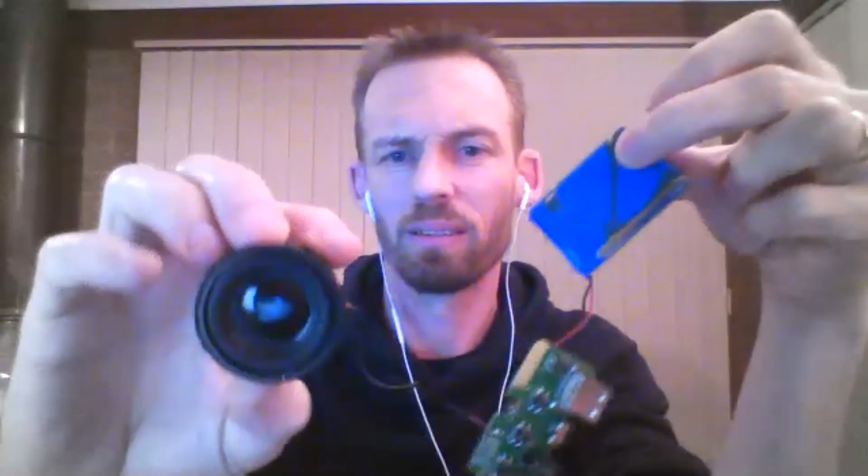Yeah. Okay, Kmart. Do you have Kmart? No, I've heard of it, but we don't have it. Just like a multi-purpose shop. They sell clothes and other random stuff.

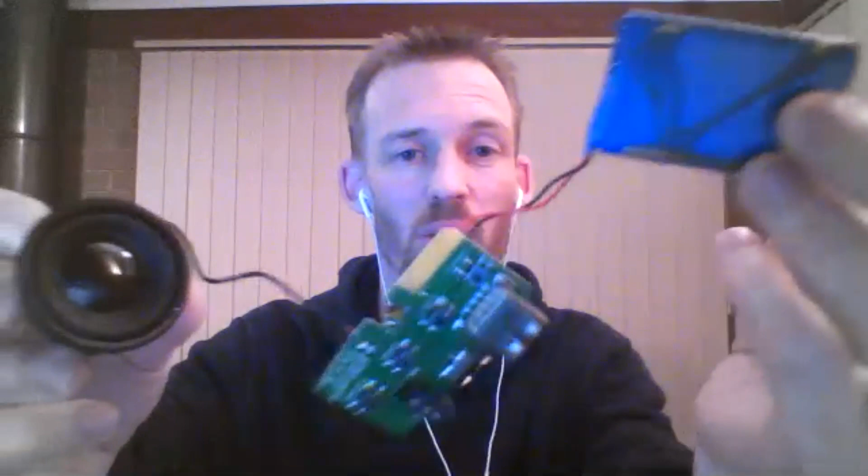Yeah, this connects via Bluetooth. So I could just stuff that in the body if I wanted to, have that Bluetooth receiver. So you can connect your phone app to a Bluetooth speaker, and then still connect this to the HC05 as well. And then when you press play on the sound, it'll play the sound. Yeah, so that's literally just an external Bluetooth speaker then, rather than anything complex. Yeah, it just means that everything's driven off of the app.

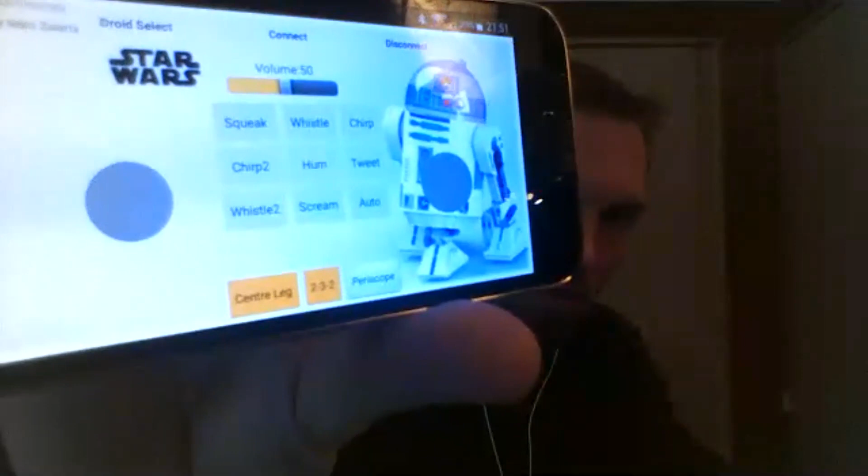So once you start using the app, I've got the option in there for all the mini droids that I've done apart from the Sentry droid. And then I stuck in your mouse droid as well. If people want to hack it and use it for that, they can use the code. Yeah, it was a good challenge to write the phone app. I think it's worked pretty well. There's been a few limitations, but it's just getting better and better and getting over some of the hiccups.

But yeah, it's been enjoyable. Great community to be a part of. Yeah, it is a brilliant group. As you said, it's the mixed skill sets that we've got. We've got Trevor and Ben who do all the electronics, and the community as a whole keeps challenging us to do more and more cool and exciting stuff. I don't think you need any more prompting. You just do more. Exactly. It's just pushed 3D printing and these models further and further forward, which is so cool.

So what's next? Are you working boosters on the side so it flies? I had thought about it, not on this one. No, I don't know what's next. I thought about doing another challenge. So I was thinking of doing like a mini gonk droid that could walk. Yeah.

My son's got a small BB-8, so I was going to reverse engineer that design and the mechanism to make a mini one to suit this scale as well. Again, just a Bluetooth control app so people can drive it around if they want to. It'd be pretty simple. It'd just be the ball rolling and the head stuck on with some magnets, just for a bit of fun. Yeah, that's sort of about it at this stage.